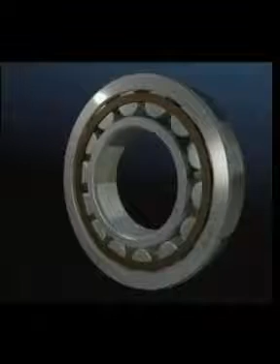This SKF training film is about cylindrical roller bearings. The most common cylindrical roller bearing consists of a flanged outer ring, a separating cage and a number of rollers. The floating inner ring completes the bearing. This type of bearing is designed for accommodating high radial loads at high speeds. This bearing is always used in conjunction with an axially locating bearing to ensure the shaft is properly supported.

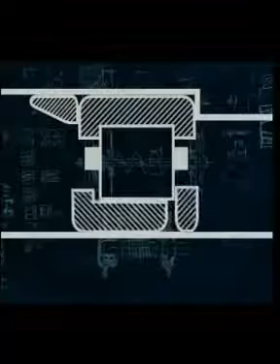Single-row cylindrical roller bearings are made in a number of variations. They can have a floating outer ring or, the most common, a floating inner ring type. This design can be supplied with a number of axial locating variations. This film will concentrate on the floating inner ring type.

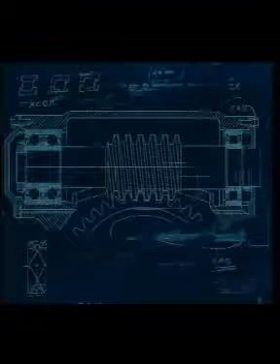The most common applications for the cylindrical roller bearing are electric motor applications, gearboxes, and many other large applications like rolling mills for aluminium foil. These bearings can have up to 4 sets of rollers per bearing, giving very high radial load capacity and stiffness, but an axially locating bearing is required. Some foil is rolled to less than 1/100th of a millimetre thick, which demands extreme accuracy from the bearings.

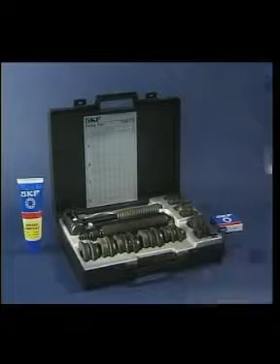The SKF Fitting Tool Kit can be used when mounting the inner ring cold. The correct parts are selected from the kit, and before fitting, make sure there's no damage to the shaft and use some light oil to assist the mounting process.

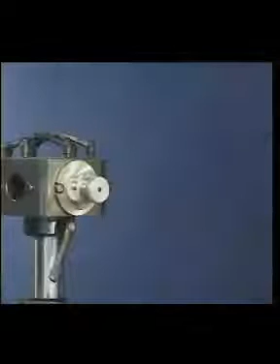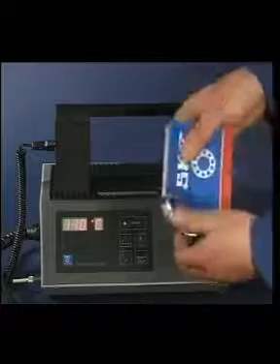An alternative way is using heat to expand the inner ring. This method of mounting is used for medium to large types of cylindrical roller bearings. SKF has a wide range of bearing induction heaters for this purpose. When using heat, do not heat the bearing above 110 degrees centigrade and always use protective gloves. Hold the inner ring against the shaft shoulder until the ring cools and grips the shaft.

The second part of the process of mounting the bearing is fitting the outer ring assembly onto the shaft. To prevent fitting damage to the inner ring, a guide sleeve is used to position the rollers during the process. Oscillation or rotation of the outer ring will assist the fitting process, as will the use of oil. This is normally a sliding fit and is easily accomplished. After removing the guide sleeve, the bearing is secured onto the shaft by means of a lock nut.

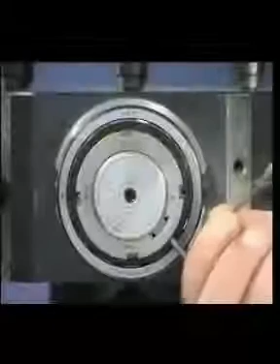For the dismounting of cylindrical roller bearings, a hot and cold method is available. For cold dismounting, remove the lock nut with the correct lock nut spanner. After removing the outer ring, a jaw puller can be used to remove the tightly fitted inner ring. On this occasion, the bearing shaft has been pre-machined to accommodate the puller arms.

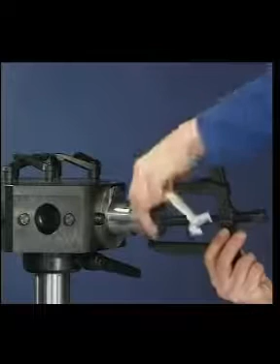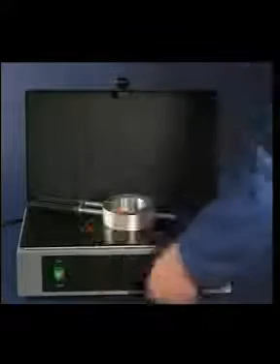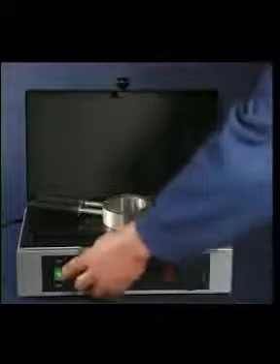By heating a special aluminium clamping ring using an SKF hot plate, damage-free removal of the tight-fitted inner ring can be achieved. The transfer of the heat from the aluminium ring expands the bearing inner ring, so ensuring a simple removal without damaging the shaft. On very large inner rings, an SKF special induction heater can be used for both mounting and dismounting.

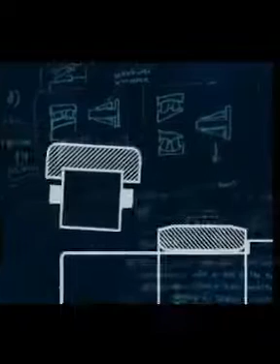Make sure not to damage the inner ring during the mounting process. A damaged inner ring will reduce the bearing life. To avoid damage, use an inner ring guide sleeve.